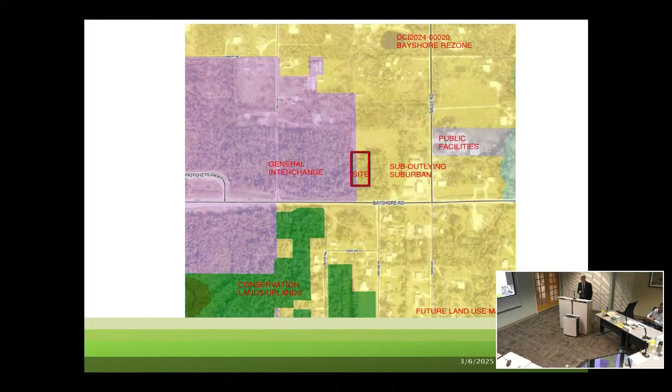If I add any one of the other parcels, it's going to require a turn lane, because FDOT came out at the end of 2023 and changed their code - anything over 15 turning movements, right-in turn movements, would actually cause a turn lane, which has got everybody in an uproar. Everybody's putting in all these turn lanes.

So right now, that's going to be touch and go. Since this one isn't in yet and we're coming in first, hopefully we'll just be able to come in without a turn lane. But it will eventually have a turn lane in that parcel.

The section from here to the east of this road is all working based on the TIS, and all the background traffic is at level of service C. The county allows us to go to level of service C, so there is a lot of capacity on the road right now. A lot of people say there's no capacity on Bayshore, because up here it's at level of service E, next to the interstate.

I think I've pretty much gone over most of this, but I'll give you a little more information for your knowledge. The funding for this has not been secured. The PD&E has not determined whether it's a north-south section, but they are looking at finishing it off, from the conversations I've had with them, by the end of this year. So the PD&E at the end of this year - if they get that approval by the end of the year, they're planning on doing this as a design build, meaning they will design and build at the same time.

So they would like to have this section in by the end of 2028, is what they're anticipating. Whether that happens, you know how FDOT is - they're never really on time, but that's what their anticipations are.

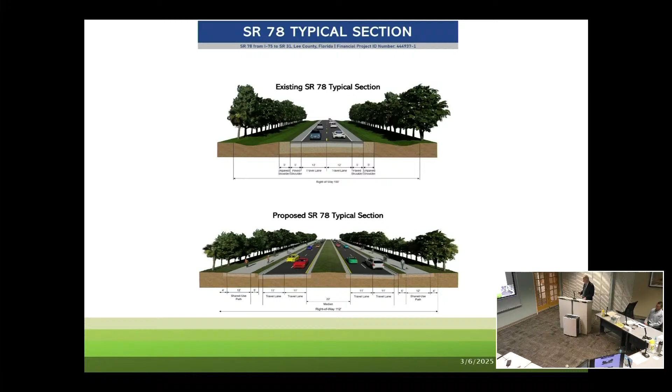The site does have potable water from Lee County Utilities. It's not shown on this, but here is the site right here. There is a large 18-inch water main that runs along this side that we can connect to with plenty of capacity. I provided that letter from Lee County Utilities.

It should be noted that the land development code criteria will be addressed on the site plan - loading areas, trash collection. There won't be any outdoor storage because we just don't have the room, to be honest with you. We're allowed outdoor storage, but there's nothing really there to put outside.

The heating and air conditioning equipment will all be fully shielded by landscaping or some kind of fencing to shield it from the right-of-way or any other properties from the ground view. The shielding material in those areas must be consistent with the design treatment and primary facade for the commercial development.

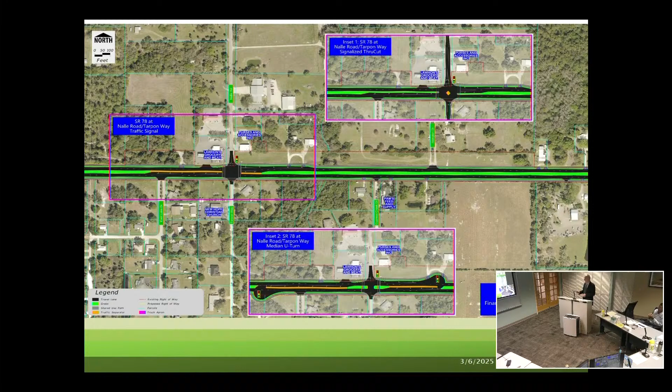There is an option, since this whole land discharges to FDOT, if there's additional capacity needed, we can always put underground storage under the pavement to satisfy them. The client may decide - I haven't talked to them about it - but they might decide to put it under if they need additional room, as long as they meet their 2% open space requirement.

I showed this specifically this way because there's an existing one here. FDOT - this parcel up here thinks that they're grandfathered, but FDOT doesn't grandfather anything. If you don't have development there, you don't get to come in. But that's the way they think, because FDOT knows they have access up here, and that's where they're going to require them to put their access if they come in and develop first.

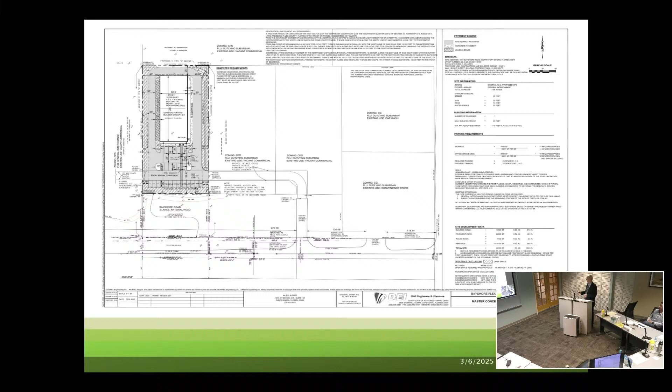It's a gas station at the intersection, right here, just north of that? Just north, that's a vacant parcel. Looks like a house, I guess. It's zoned CG, I'm just curious. I don't know what that is, honestly. I think it's a car wash. Okay, I'm sorry, I forgot now. I knew the parcel north of that, I thought that was a complete one parcel, but I know the ones to the north will have to have access here. You can see how the parcel's broken off - they own both of these parcels and this parcel. But this is a car wash, and that's the grocery store.

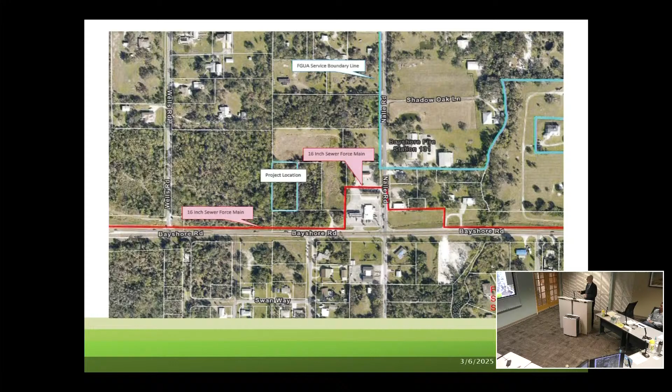As far as wetlands, there's none on the site. The floodplain extends up right behind all the commercial here. The elevation of that is AE10. So the elevation of the finished floor, based on the Florida Building Code with 1-foot freeboard, will be 11 feet.

From the environmental report in our submittal, there are no habitats that will be impacted on our property. No activity of gopher tortoises or burrows were found. There's no eagle nest within 660 feet of the parcel. The parcel is not near any red-cockaded woodpecker sightings or Florida panther telemetry points in the area. No heritage trees, no mangroves—obviously, since there are no wetlands—and the plants on the site are all pretty much native. There are no invasive species, as the environmental study noted.

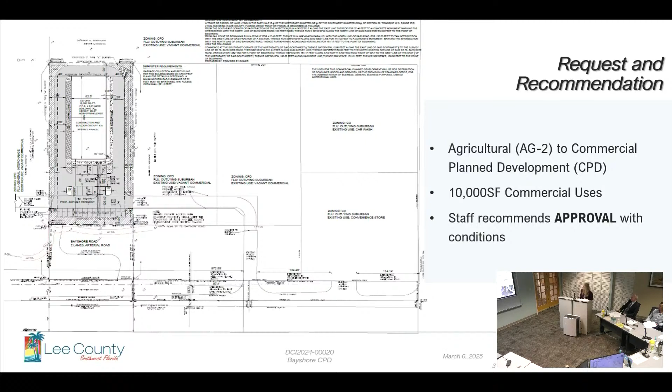Some background on the property, just quickly, as Steve covered it ad nauseam, so that was great. The subject property is located at 9461 Bayshore Road. It has one strap number and is part of the Bayshore Community Plan area. It has 2 future land use categories—General Interchange and Suburban—and is currently zoned Agricultural 2.

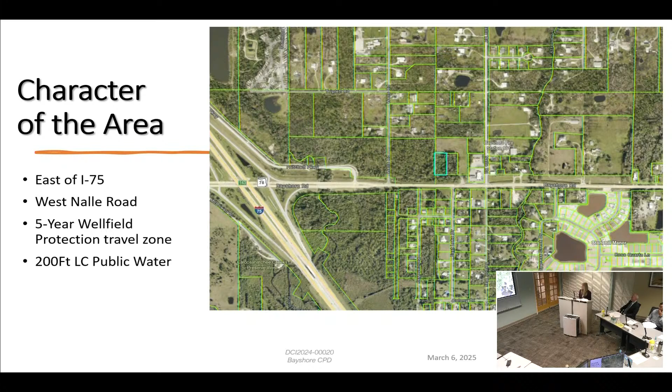Some character of the area: the property is located just east of Interstate 75, west of Nalle Road, and falls within the 5-year wellfield protection travel time zone. It's approximately 200 feet north of a Lee County public water supply well, as Steve covered for us.

The surrounding uses: the property to the north of the subject property at 9481 Bayshore Road is zoned CPD and currently undeveloped. This T-shaped property that Steve had pointed out before encompasses the north portion of the property to the east of the subject property, and beyond the CPD to the north are Ag 2 zone districts containing single-family residences along Nalle Road.

These properties all lie within the sub-outlying future land use category and the general interchange future land use as well. The lands to the south of the subject property across Bayshore Road are C1A and also reside within the sub-outlying suburban future land use category.

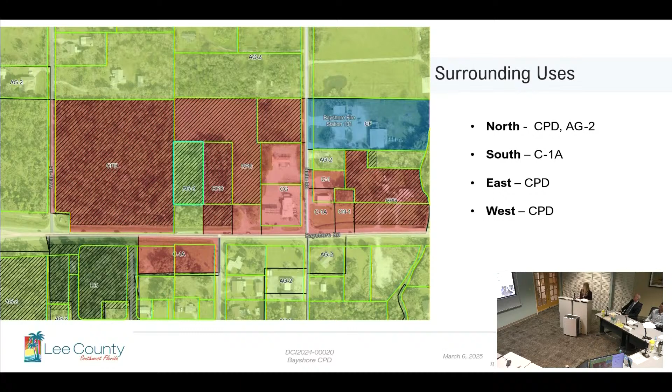Land directly east of the subject property is located in the sub-outlying suburban and general interchange future land use category and is zoned CPD for a small mixed-use commercial center, and it is also undeveloped. Property to the west is located in the general interchange future land use and is zoned CPD. It was recently approved for 100,000 square feet of commercial development intensity, up to 125 hotel units, and a variety of commercial uses.

Covering the Lee Plan, LDC section 34-145, the following slides will provide how the applicant has met the listed criteria for the hearing examiner to approve the request.

The parcel is in the sub-outlying suburban and general interchange future land use category, as we've established already. They are described in policies 1.1.11 and 1.3.2 of the Lee Plan. The property lies along Bayshore Road, a state-maintained roadway.

To the southeast and west of the subject property are existing CPDs, making the request compatible with surrounding development. And the minimal uses requested within the schedule of uses limit commercial activity in a manner that is not destructive to the character of the Bayshore rural and agricultural environments.

The western portion of the property residing in the general interchange future land use category, the request includes lighter commercial uses allowable in many of the conventionally commercial zoned districts, and are also compatible with the uses permitted in the existing adjacent CPDs.

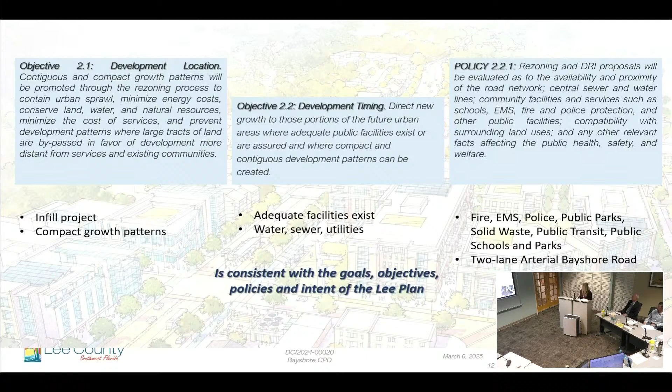Objective 2.2 and policy 2.2.1 discuss new growth in the future urban areas where adequate public facilities exist. The property is located along that two-lane state-maintained arterial road of Bayshore, and existing infrastructure of water and sewer is in place, and adequate facilities including fire, police, EMS, solid waste, public transit, public schools, and parks do serve the property.

The applicant has provided the required letter of availability from LCU, stating that lines are in operation adjacent to the property. They presently do have capacity to provide potable water for the estimated service flow demand of the project, but no reuse mains are in the vicinity.

Applicant also provided the letter of availability from the FGUA confirming the sanitary sewer lines are in operation adjacent to the subject property, and sufficient capacity also exists for that. Those fulfill the standards for 4.1.1 and 4.1.2. The applicant did state they would be connecting to those public water and sewer utilities as well.

The applicant provided the required protected species survey and the associated environmental maps. Environmental staff completed historical research of the property pertaining to vegetation and clearing, and completed a site inspection to confirm species and plant communities. Staff did note some discrepancies in the provided environmental reports, covered in the environmental staff report, including FLUCCS designations, previous development and clearing activity, and the possibility of some present wetland communities on the property. Per the LDC standards, they have recommended obtaining the jurisdictional wetland delineation.

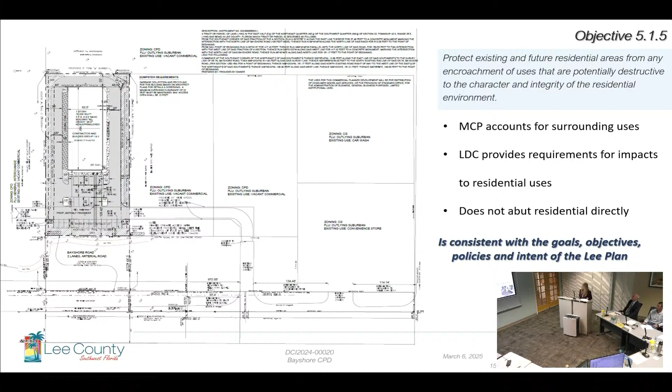Goal 6 of the Lee Plan seeks to permit orderly and well-planned commercial developments in appropriate locations. The property is in the Bayshore community, and the development is an infill project within other nearby existing CPDs. Access to the proposed development will be facilitated through an interconnection driveway shared with both CPD districts to the east of the subject property. Steve covered this fairly well with his presentation, so I won't belabor that.

Goal 18 for the Bayshore Planning Community: the objective of Goal 18 as established through the Lee Plan is to protect that existing rural, residential, agricultural, and equestrian-oriented character of the community.

The western portion of the subject property is located within the general interchange future land use category at Bayshore and Interstate 75 near Nalle Road, where minor commercial uses are encouraged. Properties to the west, approximately 1 mile beyond Interstate 75, are also designated general interchange. The remainder of the subject property is designated sub-outlying suburban, as are properties along the north side of Bayshore Road, approximately 1/4 mile and over 1.5 miles to the north, where the future land use then changes to rural.

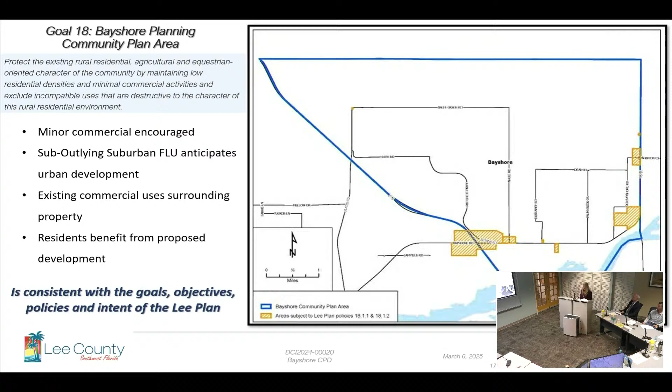Sub-outlying suburban future land use is an area anticipated for urban development pursuant to Lee Plan Map 1A. This map was actually used in the case to the west for the Bayshore Village community, provided by our planning department, which Adam Mendez covered in his case for that project. The provision of additional commercial intensity and uses in this area of the Bayshore community, which already has sites approved for commercial development, will help protect the existing rural and agricultural character by expanding commercial development where it already exists and is permitted by future land use and approved CPDs. The site's location is also the least restrictive for retail commercial land use, which is not being proposed within this community, meeting the increasing demand as the community continues to grow.

Goals 60, 61, 63, and policy 125.1.2 and 125.1.6 all deal with water quality and protection. The applicant provided a surface water management plan and stated existing conditions to the property are flatlands with minimum runoff during storm events. Runoff from the site will sheet flow to proposed dry detention and discharge to a control structure to the FDOT right-of-way. The FDOT right-of-way has conveyance ditches that flow collected runoff into their collection systems. The estimated seasonal high water table will be established and remain unchanged, with dry detention areas meeting the South Florida Water Management District's criteria for 1 foot separation above the dry detention area.

Natural Resources staff determined that one of the proposed uses originally requested, laundry or dry cleaning groups 1 and 2, had the potential to adversely impact the nearby public water supply well. The property falls within the 5-year well field protection zone travel time, which represents the amount of time it takes a potential pollutant to reach the well field. The applicant removed laundry and dry cleaning from the schedule of uses. All remaining uses are compatible with that well field protection travel time zone.

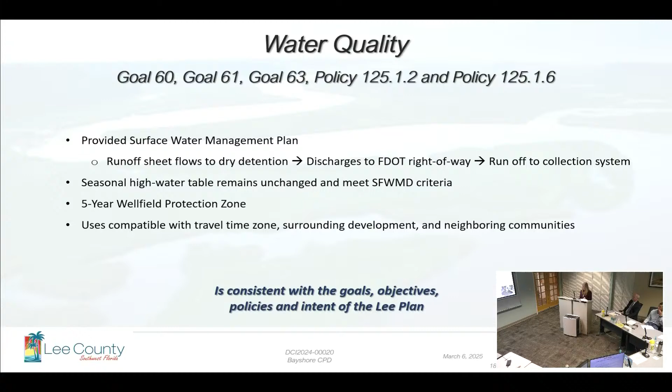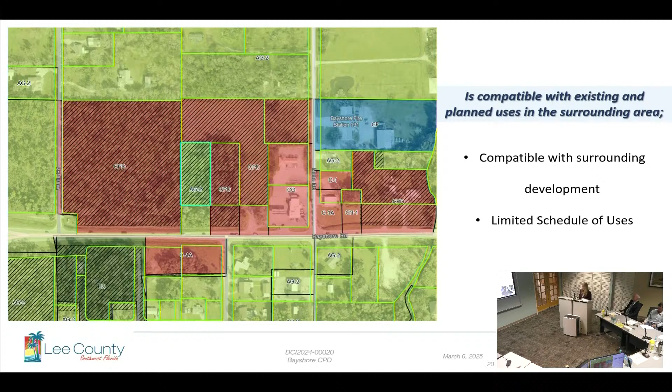For compatibility with existing planned uses, as we've already covered, the property is located within the general interchange and sub-outlying suburban future land use and other nearby existing CPDs, and the applicant's schedule of uses is limited.

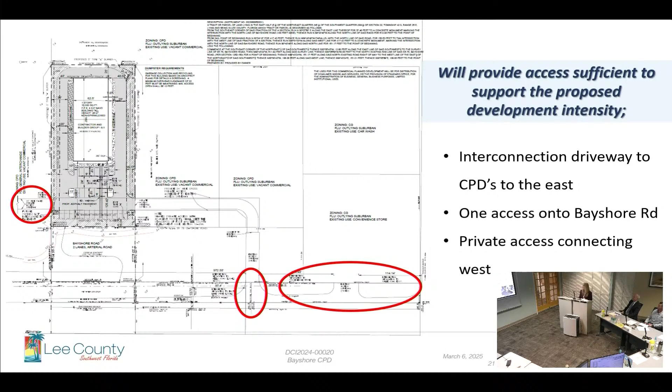Again, for providing access sufficient to support the proposed development, we've covered that extensively. We've got the interconnection driveways shared with both the CPD district to the east and one access point on the state-maintained arterial road of Bayshore, and then the private cross-access to the property to the west.

The applicant provided the required TIS. Lee County DOT provided a transportation-related analysis stating that the project generates 17 weekday AM peak hour trips and 19 weekday PM trips, and indicated that since the proposed use generates less than 100 trips per hour, the roadways and intersections level of service analysis are not required according to Administrative Code AC-13-17. Also, as previously mentioned, Lee County DOT stated that the proposed access to Bayshore Road is subject to approval of FDOT since it is a state-maintained roadway.

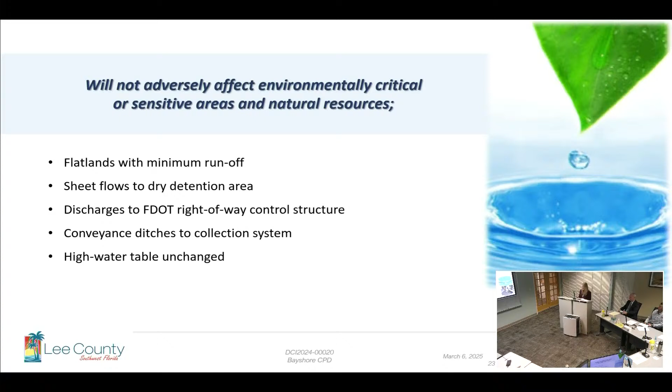The applicant provided a surface water management plan, as we've already discussed, discussing the existing conditions as flatlands with minimum runoff during storm events that eventually flow into the FDOT collection system. Further, the estimated seasonal high water table will be established and remain unchanged.

The applicant also provided the required protected species survey and affiliated environmental maps. Environmental staff completed a site inspection on January 24th of 2025, and after completing their research, they noted discrepancies within the report to existing site conditions. There is insufficient evidence that the land was previously cleared, as the survey had stated, as large oaks and large pines remained on the site, which indicated the property was no longer receiving fire at the natural intervals to maintain a healthy vegetation community.

In addition, FLUCCS 436 for upland, scrub, pine, and hardwoods was provided on the applicant's environmental report, but none were observed on the site during the staff site inspection. More appropriately identified codes would have included FLUCCS 411 for pine flatwoods in the north and western portion of the property, and FLUCCS 427 for live oaks to the south and eastern portion of the property. Within the FLUCCS 427 area, staff identified potential wetland habitats that were contrary to the environmental report.

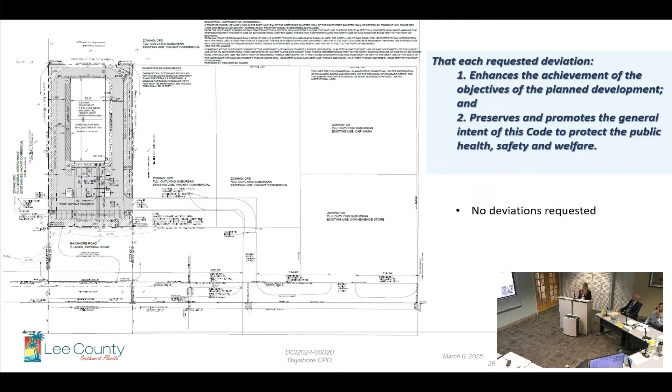And there are no conditions now on the project, so we can remove that condition part, and no deviations were requested from the Land Development Code. So in conclusion, the requested amendment meets the review criteria established in LDC Section 34-145, and staff does recommend approval. Let me check my notes, one second. I think I asked everything as we went through.

Open or outdoor storage is still a permitted use that's recommended, but they've said that they can't fit that on the site. Is it just being included out of an abundance of caution? Yeah, out of an abundance of caution, but it is consistent if they do choose to do that with the surrounding community.

Okay, I think that was the extent of my questions. Thank you. Thank you.